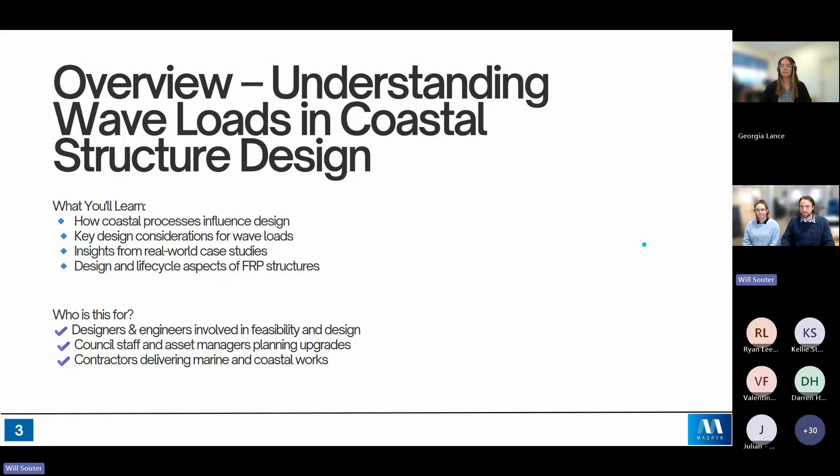Thanks, Will. So to understand nearshore coastal hydrodynamics, it's important to first understand the generation of waves in the open ocean. When winds blow over the ocean surface for a long enough period and distance, they generate what is known as sea waves. And when sea waves travel, they disperse and become more uniform in direction and frequency, transforming into swell. For anyone that's familiar with surfing or enjoys spending some time down at the beach, you'd be familiar with what swell looks like, the approaching of successive waves in groupings towards the beach.

As the swell propagates towards a coast, the waves transform as the water depth changes from deep to intermediate and shallow water. The transformation process begins when the water depth becomes less than half the wavelength. So that is, the water depth becomes less than half the distance between two successive wave crests. The process of wave transformation ends when waves become unstable and break, dissipating their energy on the shoreline or coast. The process of wave transformation includes a decrease in wave velocity, a decrease in wavelength as a result of the waves bunching up, and an increase in wave height. Wave transformation happens because the waves are affected by the seabed through processes such as shoaling, refraction, and diffraction. So first I'll discuss the process of shoaling.

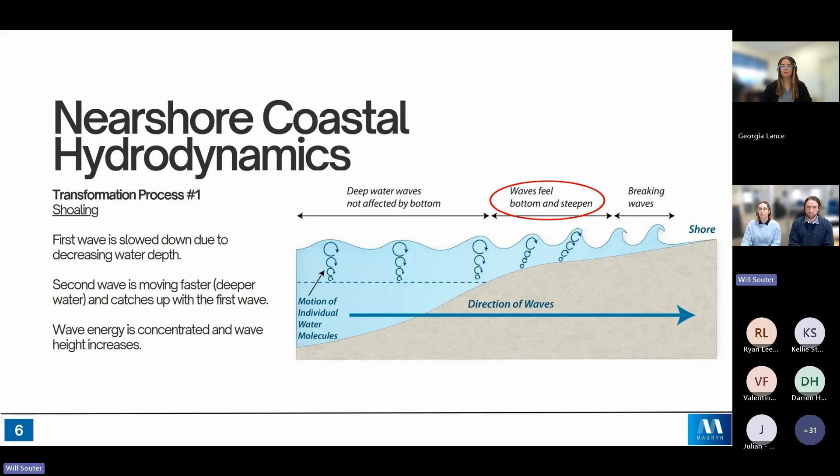Shoaling occurs in this section of the nearshore, which I've highlighted with a red circle, where waves feel the bottom or the seafloor and begin to steepen. This causes the first wave in the group to slow down as the bottom of the wave experiences drag along the seafloor. The second wave is moving faster as it is still propagating through deeper water and catches up to the first wave. This results in a concentration of wave energy as the waves bunch up together and the wave height increases. This concentration and subsequent increase in wave height is called shoaling.

The way in which a wave breaks at the end of its shoaling process is dependent on wave properties and bed slope. The breaker type can be guided by calculating the Iribarren parameter. The Iribarren parameter represents the ratio of the bed slope steepness, shown in the equation here by tan alpha, and the wave steepness calculated from the wave height and the wave length in deep water, which are represented by H0 and L0 respectively. Based on the result of these calculations, a distinction can be made between three main breaker types occurring on a coastline or a structure.

So the first main breaker type is a spilling breaker. These are usually found along flat beaches and begin breaking at a relatively large distance from the shore. They break gradually over a large distance and dissipate practically all of their energy in this process.

Plunging breakers are found on moderately sloped beaches and typically have a curling top. When this curling top breaks over the lower part of the wave, a lot of the energy is dissipated into turbulence. Some of this energy is reflected back into the sea, whilst some is transmitted towards the coast, forming a new wave. And the last breaker type here is a surging breaker.

These occur on very steep beaches relative to the long swell wave. The wave breaking zone is very narrow, and more than half of the energy is reflected back into deeper water. The waves surge up and down the slope, which is why they're called a surging breaker. Each breaker type can impart different horizontal and vertical wave loads onto structures, so it's important to consider this in the design, as we'll discuss later in the presentation.

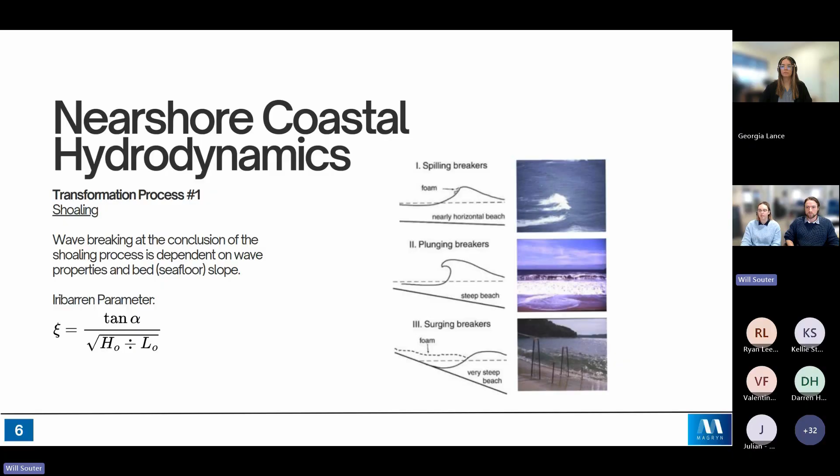So the second transformation process is refraction. This phenomenon occurs along a wave crest. When waves approach underwater contours at an angle or obliquely, the sections of the crest that are in deeper water travel faster than sections of the wave crest in shallower water. This results in the wave crest turning towards the underwater contour, and the waves are now approaching from a perpendicular or shore normal angle.

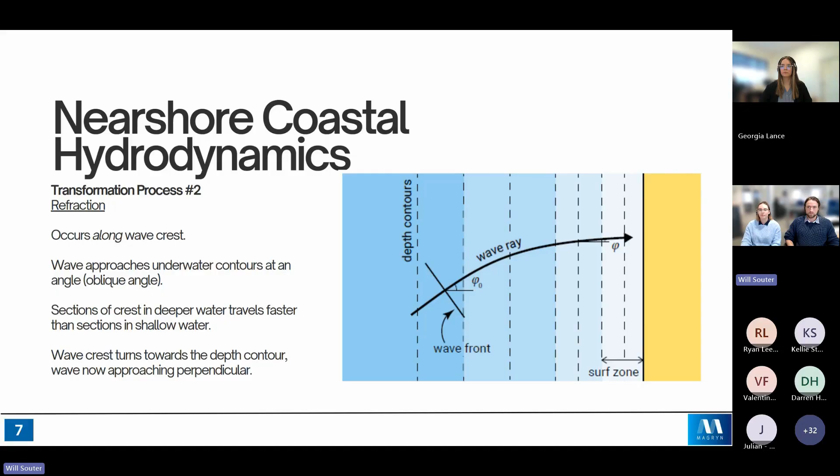And we can see this here in this image of Town Beach at Robe, down here in South Australia, where the waves have an incident approach angle from the northwest. So they're approaching the shoreline obliquely. And as they approach the beach, the changes in bathymetry cause the waves to refract, and they reach the beach at a shore normal angle, as we can see there.

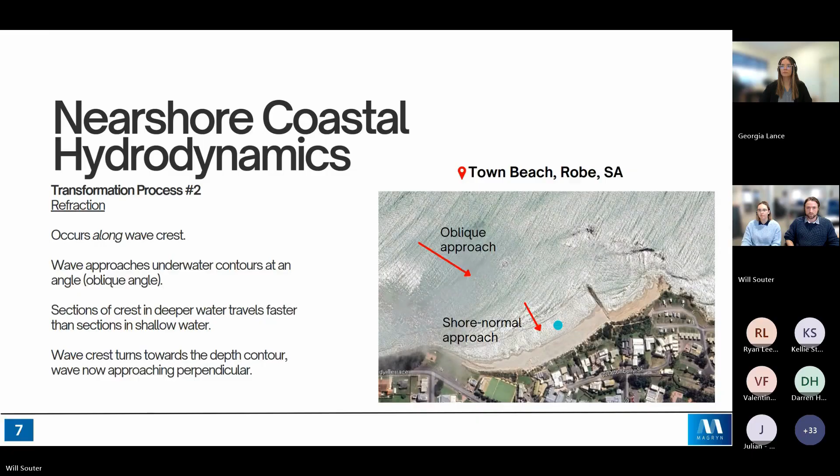Though not a wave transformation process, another nearshore coastal hydrodynamic that is important to understand and consider when designing for wave loads is the effect of storm surges. A storm surge is the combined effect of wind setup and lowered atmospheric pressure in a storm center. Wind setup is an increase in the still water level at a coastline due to the wind-induced shear stresses on the upper parts of water layers, which is shown in the diagram on the slide.

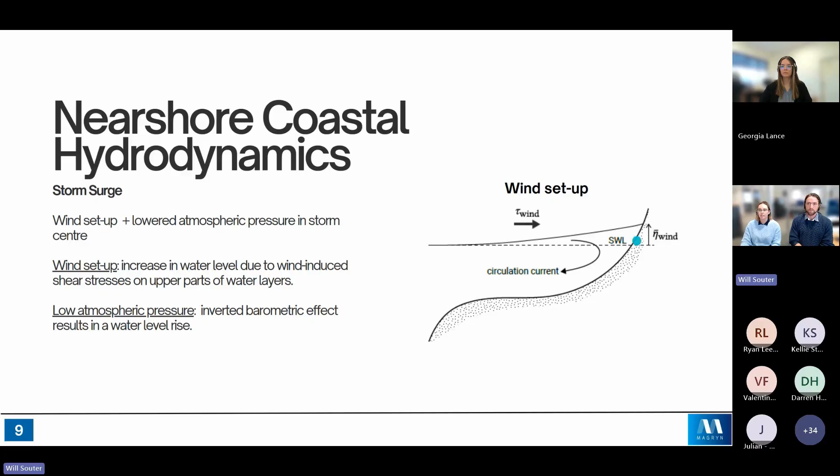When wind blows parallel to the ocean surface, it generates a wind-directed current. When this momentum reaches a barrier, such as a coastline, it piles up against the coast, resulting in an increase to the water level, as we can see here. Low atmospheric pressure, such as those that occur in the center of a storm, reduce the atmospheric force pushing down on the water surface, allowing it to rise slightly. This is referred to as the inverted barometer effect.

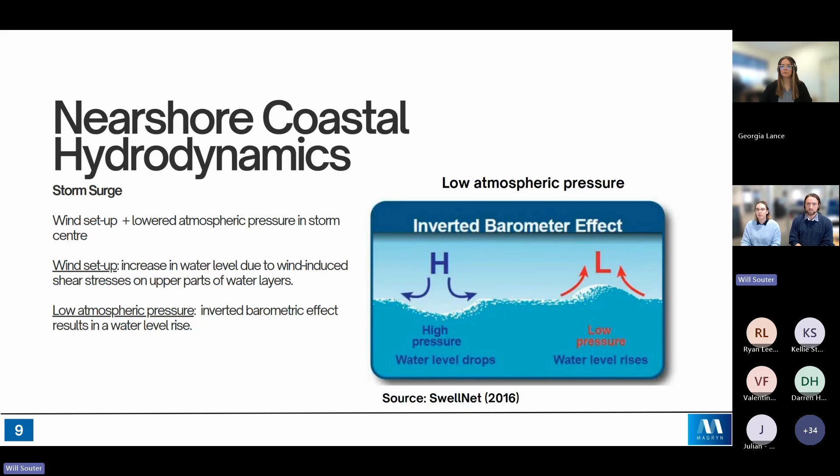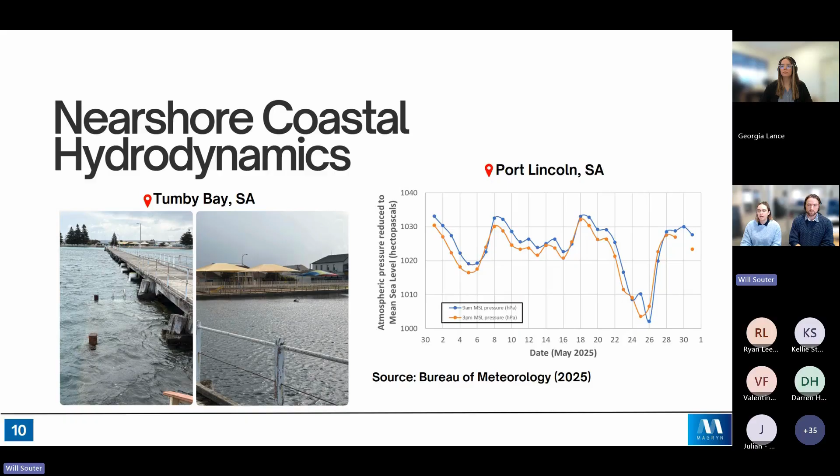The severity of a storm surge depends on its timing relative to the tidal cycle and the duration of the storm system. Now that I've explained how waves are generated and transformed in the nearshore, I'll move on to how they drive coastal processes and sediment transport.

There are two main sediment transportation processes in the nearshore. For simplicity, these processes are split into cross-shore and longshore transport, but it is important to note that they are coexisting processes. Cross-shore sediment transport refers to the cumulative movement of beach and nearshore sand perpendicular to the shore. This transport is driven by the combined actions of tides, wind, and waves, and the shore perpendicular currents produced by them. Small cross-shore adjustments occur during each tidal cycle, and seasonal cross-shore changes are typical with changes in wave and wind climate. Typically, summer will see more onshore transport or accretion, and winter will see more offshore transport or erosion.

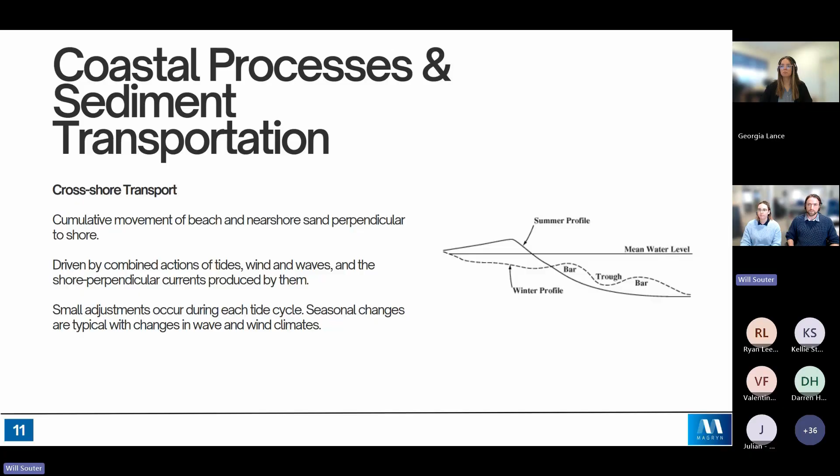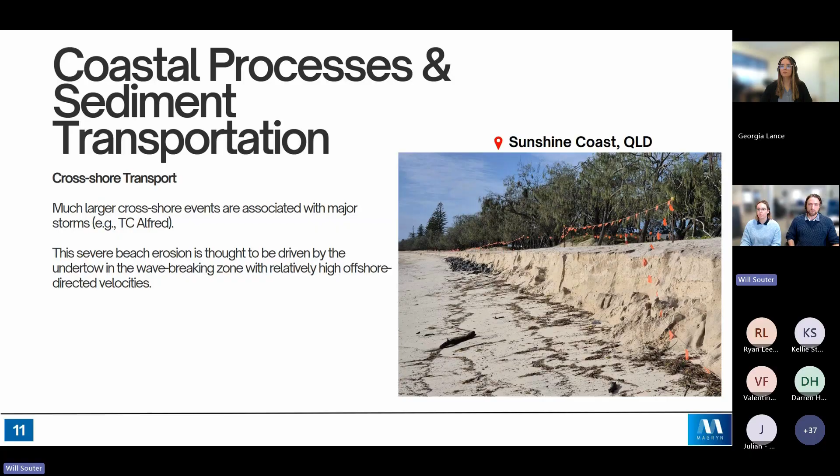Much larger cross-shore events are associated with major storms, such as Tropical Cyclone Alfred, which hit the Queensland coast earlier this year, creating up to 3-meter erosion scarps. This severe beach erosion is thought to be driven by the undertow in the wave-breaking zone with relatively high offshore directed velocities.

Longshore or littoral sediment transport refers to the cumulative movement of beach and nearshore sand parallel to the shore. This process is a result of the longshore current that is predominantly driven by waves approaching the shore at an angle. Tides and wind forces can also contribute to this current, but the wave process is the most predominant. The magnitude of longshore transport is directly related to the incident wave energy, as larger waves mobilize more sand, as well as the angle of wave approach.

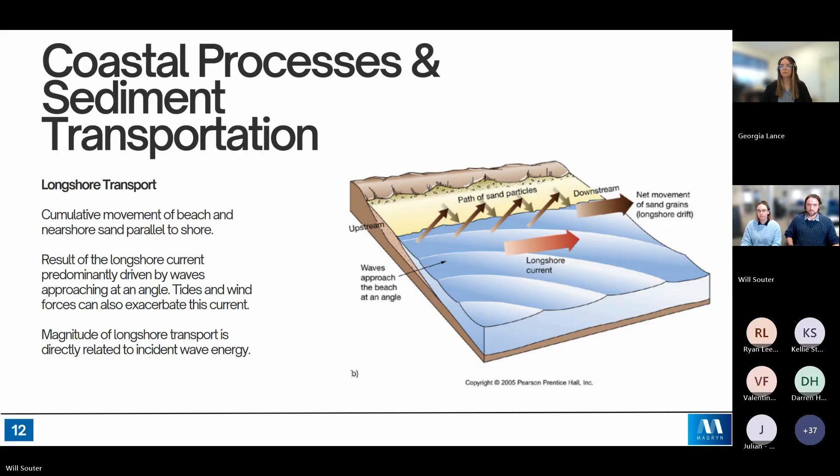Longshore transport is not as easily discernible as cross-shore transport. Changes to coastlines due to longshore transport are typically recognized due to changes in wave height and approach angle, or the construction of shore perpendicular barriers, such as groynes or breakwaters, as shown in these images of the construction of the Cape Jaffa Marina down here in SA. The Cape Jaffa Marina was constructed in 2008, and we can see that there has been a disruption to the longshore transport process, with the western beach here building up quite substantially.

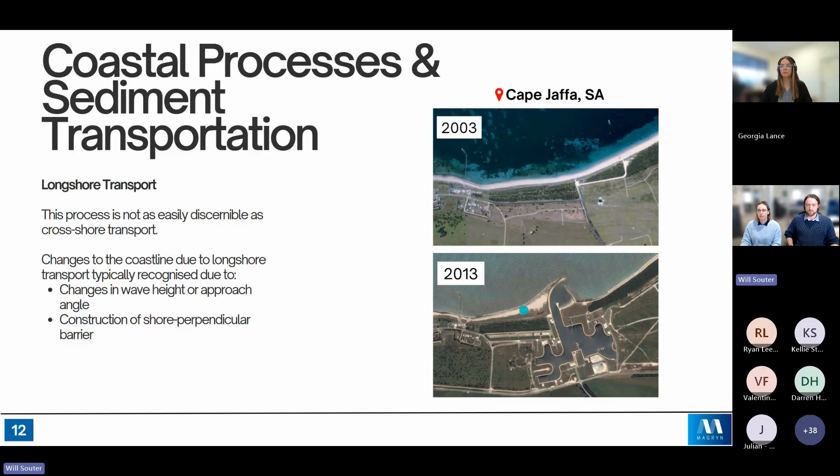Understanding the impacts of climate change on the processes that I've discussed here is imperative in designing coastal structures for long-term resilience, safety, and accessibility. Sea level rise is the most notable threat to coasts, though additional threats include increases in the frequency and magnitude of compounding sea level effects, such as tides and storm surges. The Intergovernmental Panel on Climate Change, or the IPCC, is virtually certain that global mean sea level will continue to rise in the 21st century, with increases from 0.5 to 1 meter, depending on the emission scenario.

Sea level rise leads to increased water depths, resulting in larger waves breaking closer to the shore. This impacts processes such as sediment transportation, erosion, changes to typical breaker types, and wave loads. Another important predicted impact of climate change to consider in designing coastal structures is the frequency and magnitude of extreme sea level events. The IPCC project that, due to relative sea level rise, extreme sea level events that occurred once per century in 2020 will occur at least annually, so a 1 in 1, at more than half of all tide gauge locations by 2100. Therefore, understanding the influence of extreme sea level events in conjunction with high wave events at specific sites is incredibly important to investigate prior to designing a coastal structure. I'll now pass back to Will to discuss the considerations of designing for wave loads.

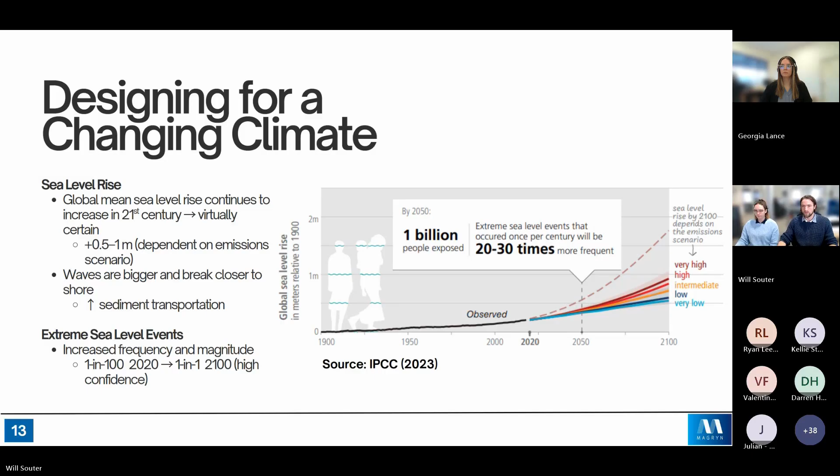Thanks, Georgia. So with that foundation on coastal processes and wave dynamics, I'll now talk through how these conditions shape the design of structures such as jetties, ramps, and beach access structures. So let's begin with location. The level of exposure to wave energy at a site can vary dramatically depending on the setting. So for instance, an open coastline exposed to long period swell waves can experience high wave impact forces. In contrast, sheltered bays or areas behind headlands benefit from reduced exposure.

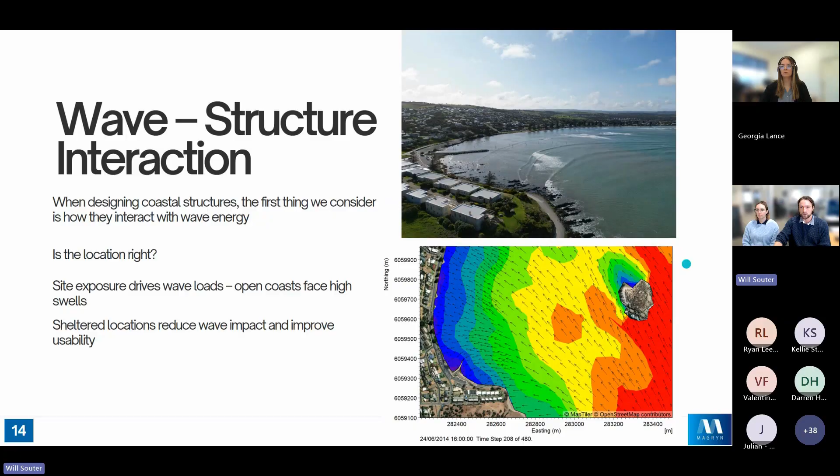So a good example is shown here at Encounter Bay in SA on the Fleurieu Peninsula. The boat ramp was strategically located in the corner of the bay here. The positioning takes advantage of the natural protection provided by the headland. They've also installed a breakwater to further reduce the wave climate. So understanding the wave climate of the area and how waves interact with structures is crucial for making informed decisions.

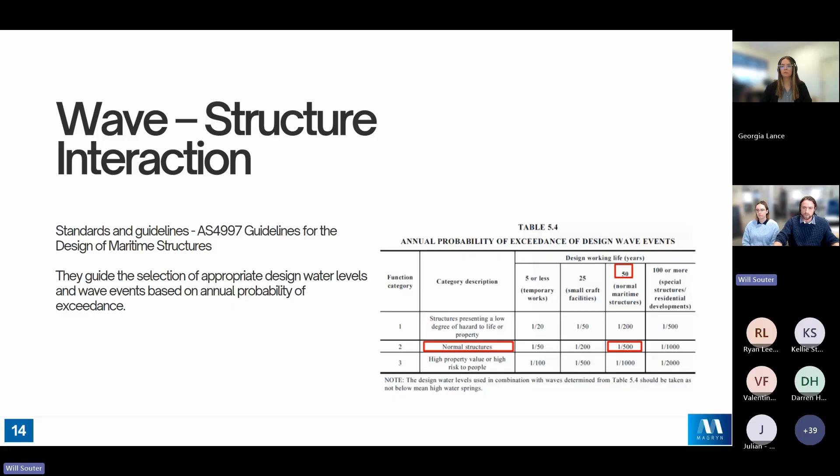So I'll just briefly talk about some of the standards and guidelines, such as the guidelines for design of maritime structures, which can help define parameters such as the structure function category, design life, and how that relates to loading scenarios. So they guide the selection of appropriate design water levels and wave events based on the annual probability of exceedance. So there's often some engineering judgment required as well when it comes to assessing wave loads based on the acceptable risk, the site exposure, and the intended use of the structure.

Now, let's dive into the impact of the different types of waves and the bathymetry on structures, building on what Freya has already talked about. So when designing structures located in the nearshore environment, it's critical to understand that the highest waves do not always coincide with the highest water levels.

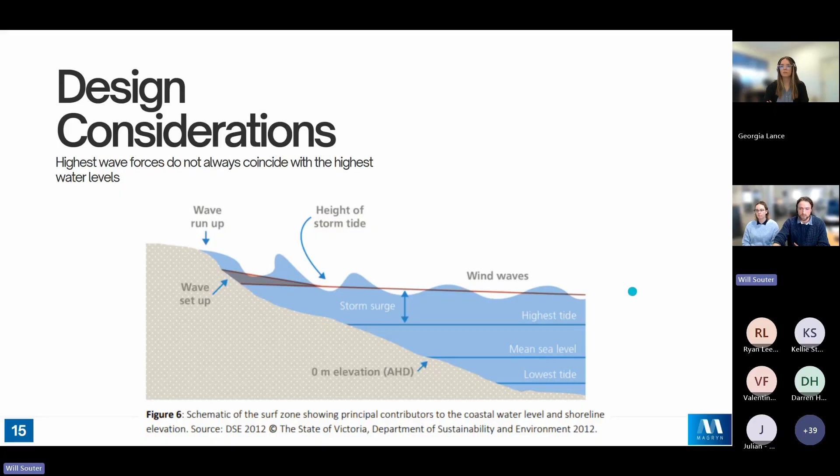So as waves propagate into shallow water, they undergo transformation processes, and that can significantly alter the characteristics and the resulting loads. So when waves break onto a structure, this can impart very high impact forces and may exceed those generated under conditions at higher tides, or certain parts of a structure may be subject to higher wave forces depending on the bathymetry of that point in the structure. As such, it's essential to evaluate a range of water levels and wave conditions to identify the critical design scenario.

So as you can see here, there's a large difference if you had something like a jetty structure located in this zone where most of the waves are within the wave zone compared to this zone, and you've got higher wave crests in the nearshore as they begin to break and the elevation increases. So uplift loads from wave impact can be severe if the crest reaches or overtops the underside of the deck.

So this raises a key question. Is it more cost effective to elevate the structure entirely above the wave zone, or to design a more robust structure that can withstand wave forces while partially submerged? If we're elevating the structure, it's important to consider factors such as wave setup, nearshore wave transformation, and potential sea level rise.

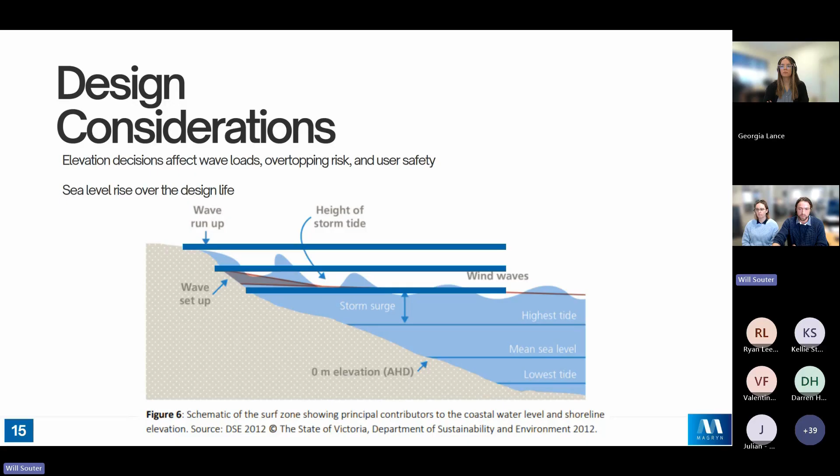So if the structure must be located within the wave zone, special attention should be paid to the uplift forces, as mentioned. One strategy would be to incorporate porosity into the decking. So grated systems allow for the pressure to pass through, significantly reducing the uplift compared to solid decking.

We've looked at waves on the structure in a cross-section sort of view. It's also important to consider looking at it in plan view in respect to wave direction and wavelength, so considering how the waves vary spatially as well as temporally. So waves impacting a jetty from an oblique angle or perpendicular, as shown in the figure here, will impose vastly different forces to waves coming from this direction parallel to a jetty.

So a wave coming from this direction might cause forces that are acting simultaneously across a large portion of the structure, whereas waves in this direction would run along the jetty and there would only be parts of the structure impacted at one time, such as shown in the photo here.

So in regards to specific detailing of structures and how wave loads impact them, the drag coefficient plays a significant role in determining the wave-induced forces. Profiles with higher drag coefficients, such as flat or angular sections, experience much larger forces. So where possible, designers should consider using streamlined profiles, such as circular piles or members with chamfered edges, that have lower drag coefficients.

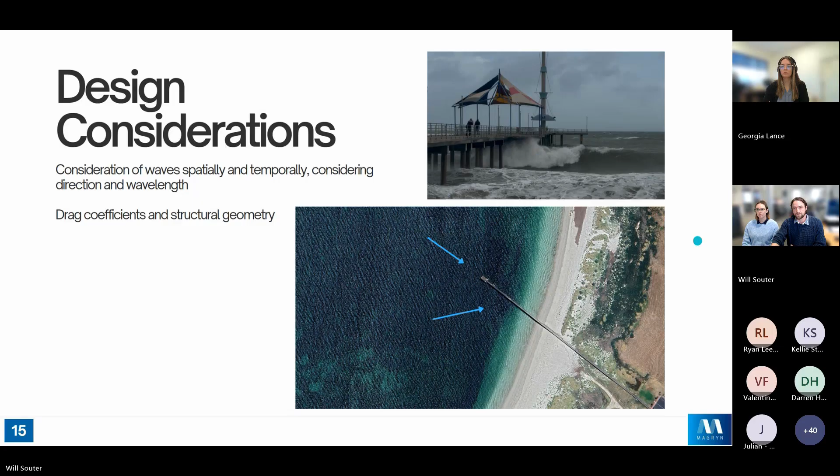Now, while understanding wave structure interaction is critical for estimating the loads, it's equally important to consider how the coastline itself evolves over the life of the structure, particularly when you're dealing with dynamic sandy coastlines like we have in a large portion of Australia. They're subject to processes such as storm erosion and long-term recession, as Freya talked about.

For instance, a ramp or stairs supported by piles may be structurally sound under current levels, but may in the future become undermined if the beach erodes, as is illustrated here. Similarly, increased water depth due to long-term recession can expose more of a structure to wave action than originally anticipated. This can also amplify the wave loads.

To address this in the design phase, it's basically recommended to conduct thorough investigations on the specific site, such as surveying the beach profile, modelling where possible, reviewing trends, and this helps us forecast potential changes in the future, allowing us to design structures that can accommodate them.

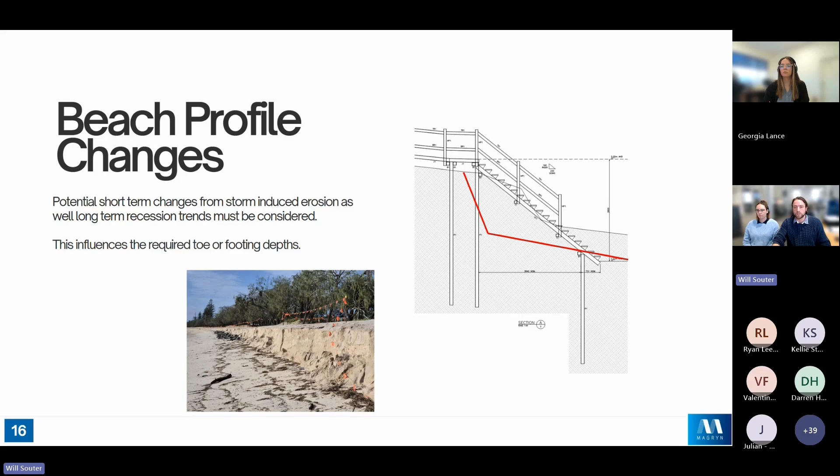So the complexity of wave structure interaction combined with the dynamics of the coast highlight the importance of site-specific design. We'll now look at a few examples that demonstrate different site conditions. These are some beach access stairs in South Australia on the Fleurieu Peninsula. We designed these stairs on a steep erodible beach exposed to powerful Southern Ocean swells. So it demanded a robust and adaptive design.

The key features of the design include it was set back landward as far as we could go into the existing dunes to minimise the impact of waves and its exposure during high water events. It also had deep pile footings to resist undermining, and the treads were also embedded well below beach level to allow for that forecasted erosion. We also allowed for uplift loads on the lower part of the structure in the event of wave loads.

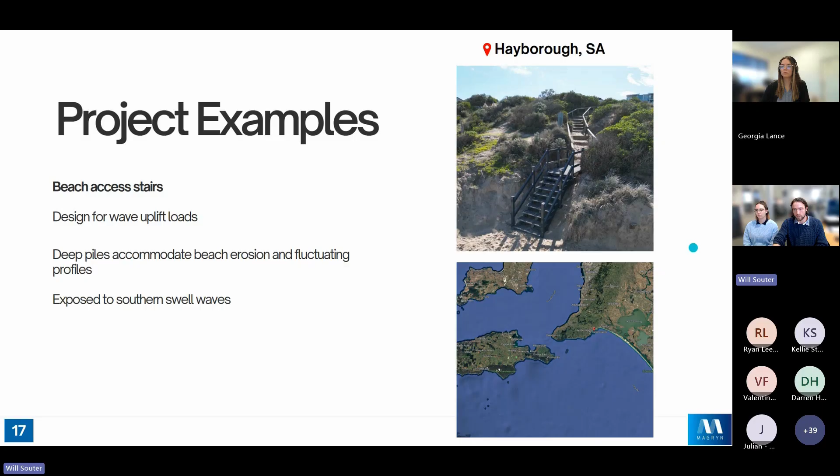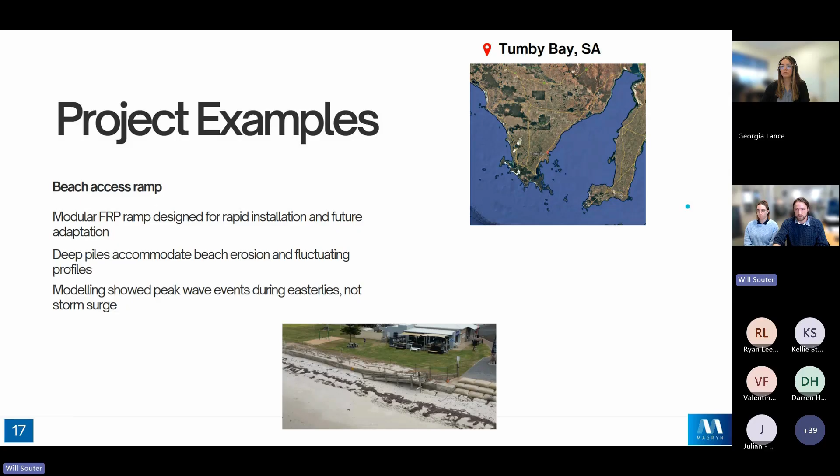Another example, at Tumby Bay, we designed a beach access ramp for a dynamic shoreline on the east coast of the Eyre Peninsula, which is the site that Freya mentioned before. It's subject to seasonal profile changes and wave exposure driven by easterly wind events. So the client is after a disability compliant public beach access ramp to replace this existing timber structure that is leaning and has already had issues due to erosion of the changing coastline.

The ramp was designed using modular FRP components, allowing for prefabrication, easy transport, and fast on-site assembly. This is just a photo montage, but it shows what it would look like and how it would interact with future upgrades of the coastal protection measures. So that was a key part of the design, it had to be adaptable as they change the coastal protection in the future. It also had pile foundations embedded well below expected erosion depths.

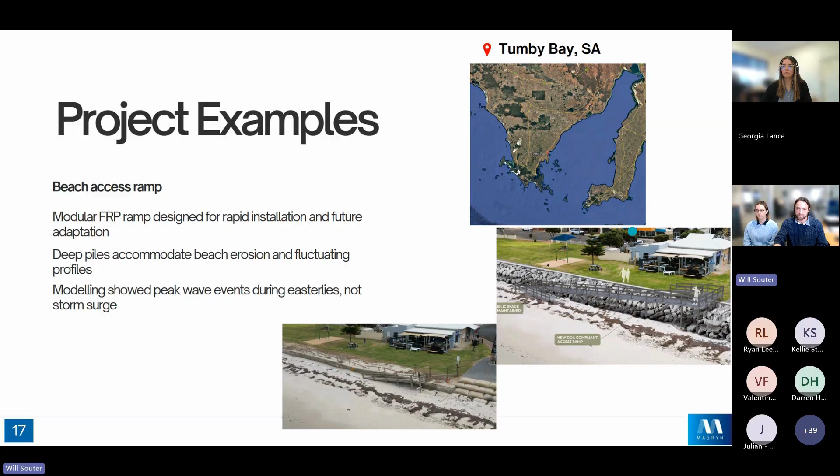And what makes Tumby Bay interesting is highest wave events do not occur during the highest water levels, and that's because it faces east. As you saw in the photo earlier when Freya was talking about it, when we had the storm surge the other week and a lot of the Adelaide coast was seeing extremely high waves, Tumby Bay was pretty much like a lake because of the direction that it faces. Storm surges are typically driven by southwesterly or westerly winds. So to address this at sites like this, it's important to undertake things like spectral wave modelling to understand the correct load combinations for the design, as well as beach profile modelling to simulate erosion, as I've already talked about.

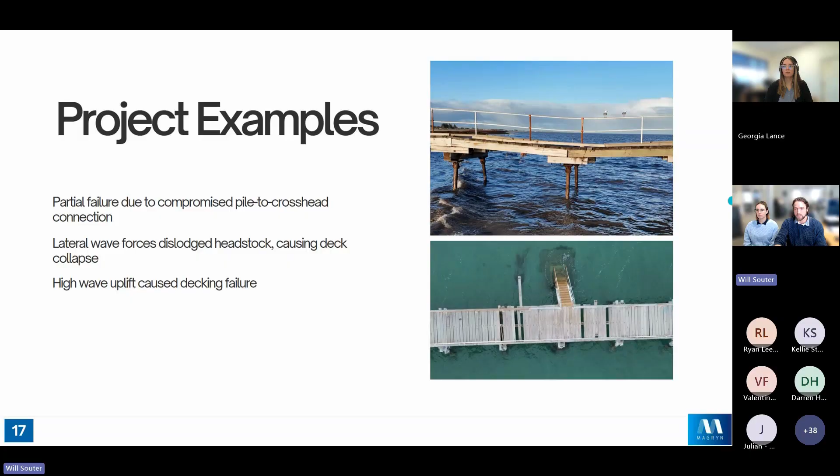These recent failures of timber structures serve as a stark reminder of the vulnerabilities inherent in traditional materials, especially in marine environments and under wave loads. So timber's been used and steel has been used a long time in coastal infrastructure, but it's susceptible to corrosion, degradation, and has ongoing challenges. So that's where, in this context, FRP has emerged as a compelling alternative, offering durability, constructability, life cycle benefits in these types of structures along the coast.

Coastal environments are complex, and every site has its own unique challenges, as you've seen today. The coastlines are becoming more and more dynamic as a result of climate change, and designing resilient and maintenance-free structures is more important than ever.